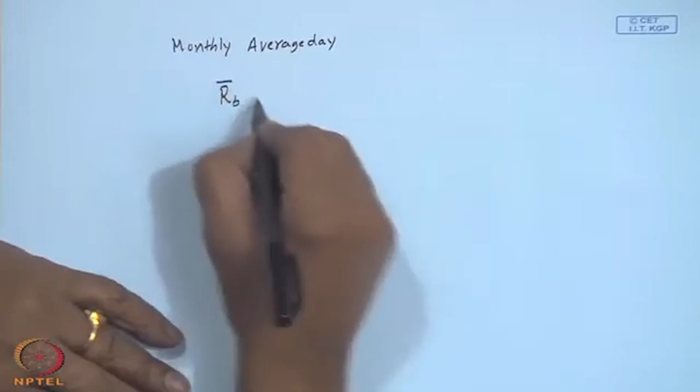As we have done for flat plate collectors or fixed slope surfaces, R b bar m for simplicity is nothing but R b bar evaluated with delta equal to delta mean, where delta mean is the recommended mean declination for each month. So the formulas are known and there are analytical expressions for mode 1, 4 and 5, and modes 2 and 3 are not analytically integrable, so one may have to go for numerical integration.

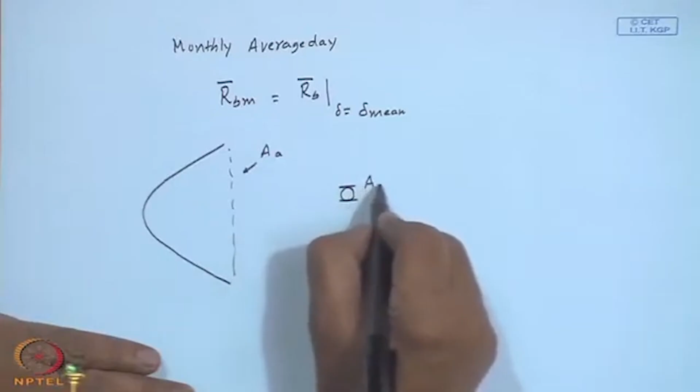Whether I b under terrestrial conditions is used or even under extraterrestrial conditions. Now the question comes: we have a parabola with an aperture area A a, focused onto a receiver of projected area A r, and the geometric concentration ratio is defined as A a upon A r.

Now, can we have C r equal to 10? Maybe yes. 100? Yes. 1000? Question mark. 10,000?

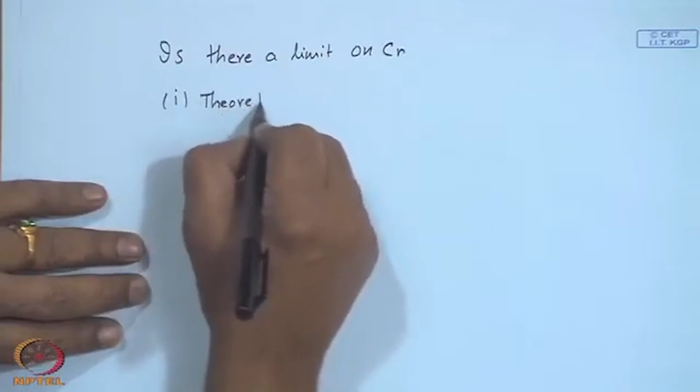Let me go to the next page. Is there a limit on C r? One, a theoretical limit. Second thing may be practical, arising due to manufacturing.

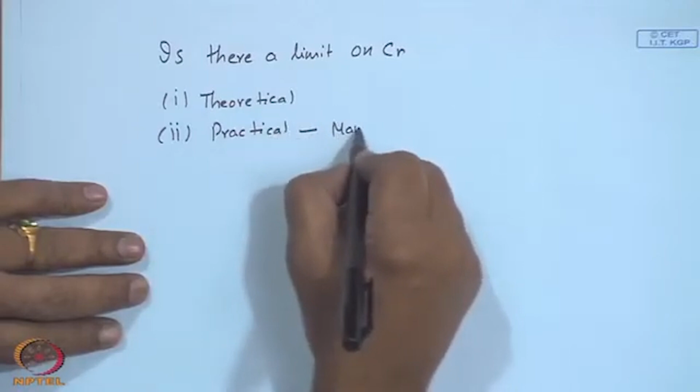For example, how perfect is the reflector, how perfect is the refractor, how perfect is the optics, and though we do not aim at 100% efficiency from the thermal point of view, will all the radiation that is passing through the aperture get reflected and go exactly onto the receiver, depending upon the tracking mode.

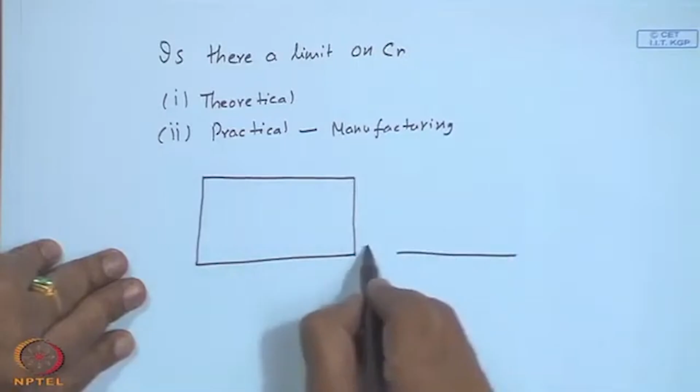So practically, if you take the plane of the receiver, my distribution will not be a perfect rectangle like this, but it may be something like this, going a bit beyond the receiver, and technically I may have to integrate from minus infinity to plus infinity, whereas this may be of minus w by 2 to plus w by 2, and intensity also may not be uniform. This is one aspect.

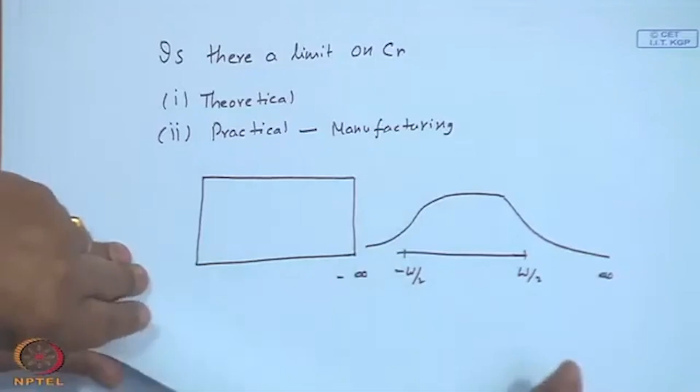And regarding the reflected rays, whenever we are showing it as a cross section, this is the small receiver, circular type, and this is the reflector coming over here.

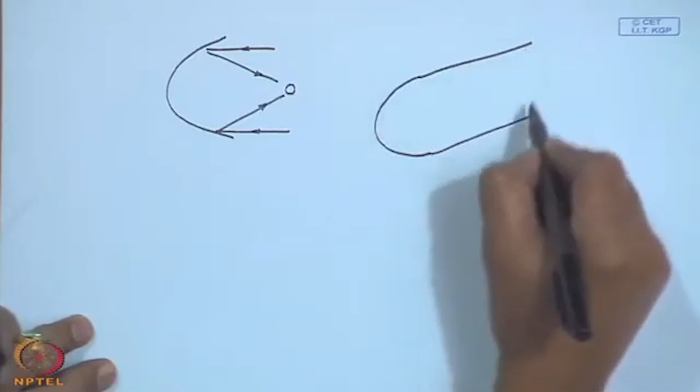Now, if I make it a somewhat two-dimensional view, this may be the reflector and the tube may be here. So, depending upon the tracking mode, my reflected rays may go to east or west or north and south, and may not exactly fall on the receiver tube.

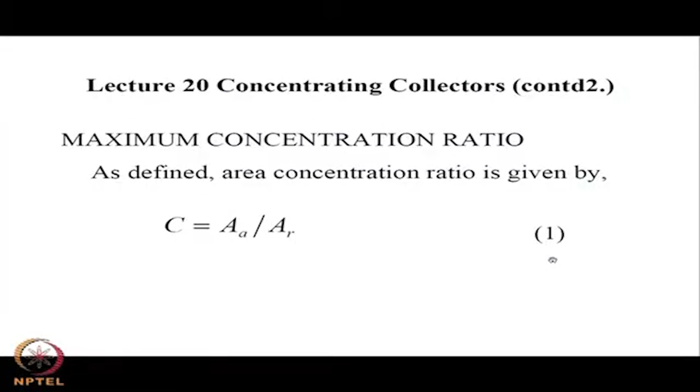So all that reflected radiation may not be captured by the receiver. Effectively, the concentration ratio could be different, but even if we talk about only the theoretical possible maximum concentration ratio, this has an upper limit depending upon...

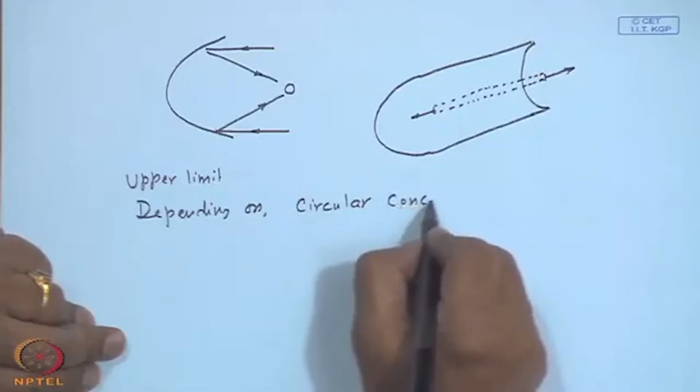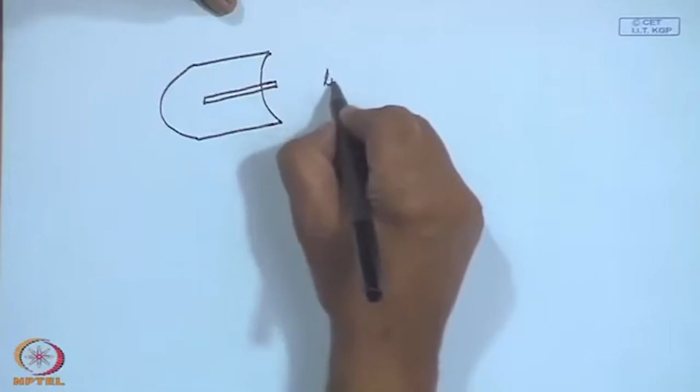...whether it is circular concentration or linear. So if you have a parabolic system like we have drawn now, the attempt is to focus onto a line. So this is a sort of linear concentrator.

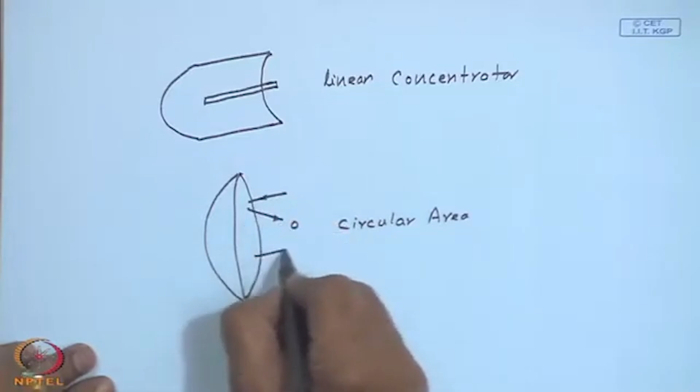The other way around is, if you have a paraboloidal dish, this will try to focus onto a circular area. So technically, this can be a point, this can be a line, or is it possible? So which we shall show, the possible maximum.

Let this big circle be the sun, of radius r, at a distance of capital R from the aperture area, and at the same distance the receiver also, making the half angle theta s.

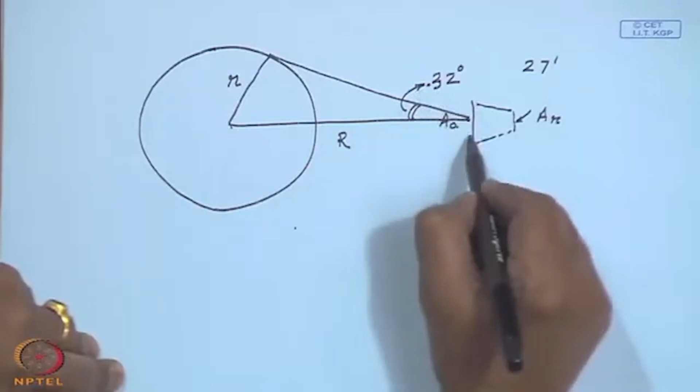Or 27 minutes. For a perfect concentrator, this is the sun of radius r at a distance from the earth of capital R, and the angle subtended is 0.32 degrees onto the aperture area of A, and A r is the receiver area.

You do not have to worry whether this should be before or after, it is only a symbolic representation showing A is not equal to A r, A r being the smaller thing. The issue is, if we consider a circular concentrator, can I make A r almost 0, making the concentration ratio infinity?

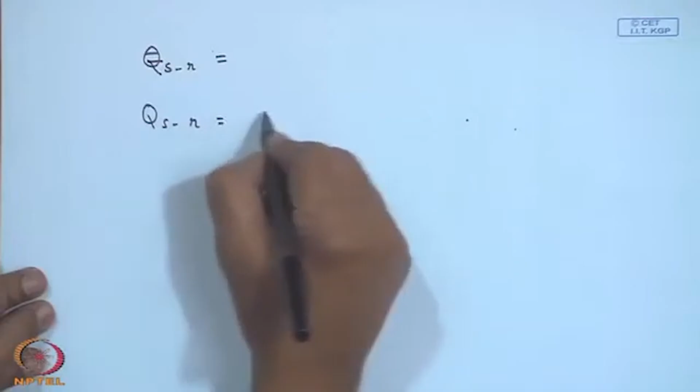So, the radiation emitted by the sun reaching the receiver will be A a into r squared upon capital R squared, times sigma T s to the power 4, where r is the radius of the sun and capital R is the distance, sigma is the Stefan-Boltzmann constant, and T s is the effective temperature of the sun.

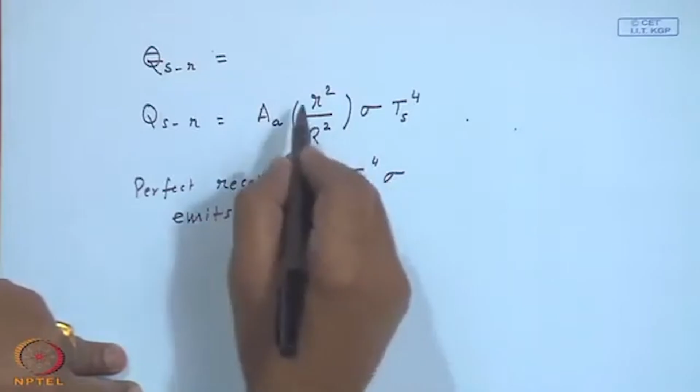A perfect receiver radiates - a perfect receiver emits area A_r into T_r to the power 4 times the Stefan Boltzmann constant sigma. You may be wondering, we are not really worried about reflectivity etc. This is the radiation intercepted by the aperture; the same thing will reach the receiver at maximum.

Now a fraction of this will go from the receiver to the sun, because the receiver is small and the sun is big: A_r T_r to the power 4 into sigma, multiplied by the fraction E_rs. So of the emitted energy at temperature T_r by the receiver, a fraction E_rs will go back to the sun.

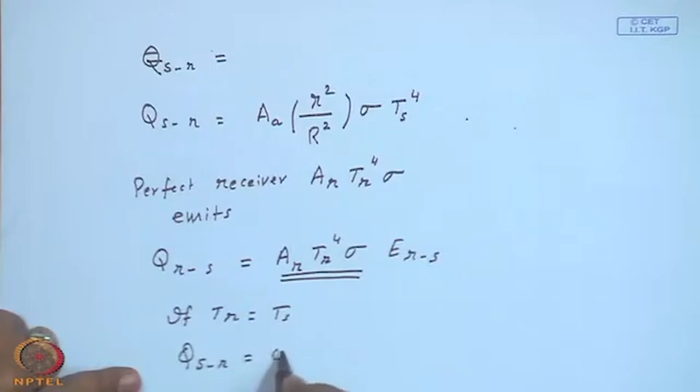Now, if T_r equal to T_s, that means in principle if the receiver reaches the sun's temperature, my Q_sr should be equal to Q_rs. Since there is no more temperature change between T_r and T_s, the emitted radiation should be equal to the radiation received from the sun.

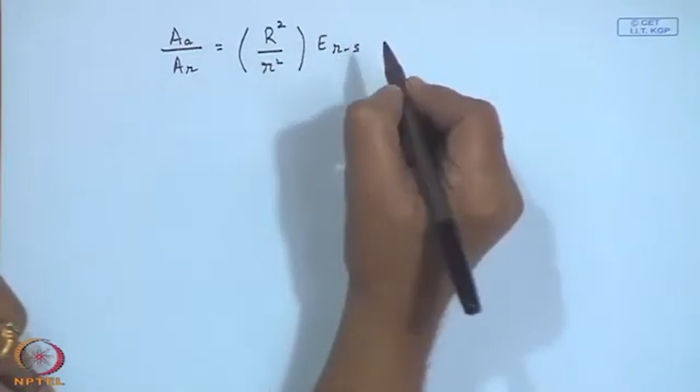So that gives us A_a by A_r equal to r square by r square times E_rs. Now for the maximum value, we are estimating the theoretical maximum, so I can assume this E_rs equal to 1. So (A_a by A_r) max equal to r square by r square equal to 1 by sin squared theta_s.

So if theta_s equal to 0.27 degrees, the maximum possible concentration will be 212. If you put in the value of theta_s, you will get 212. This is for a circular concentrator.

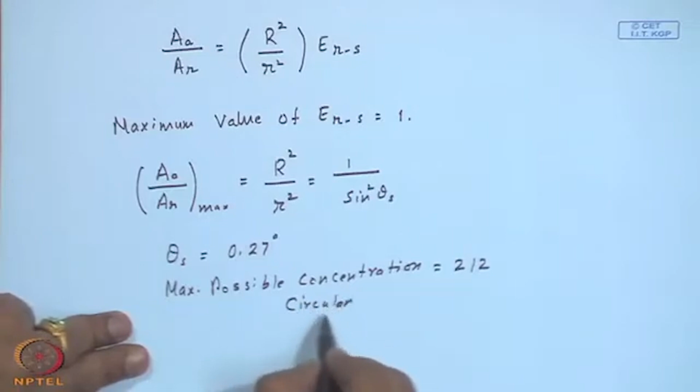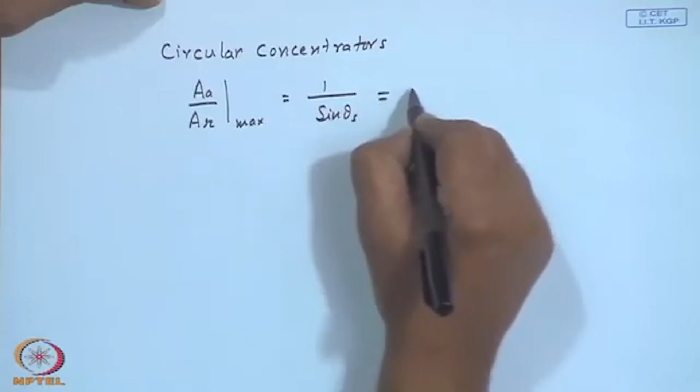So a similar procedure for circular concentrators gives the max concentration, which goes to 45,000.

Okay, I will just check these values in the next class, because I think somewhere this linear and circular concentrators numbers are confusing. I will just check up these numbers.

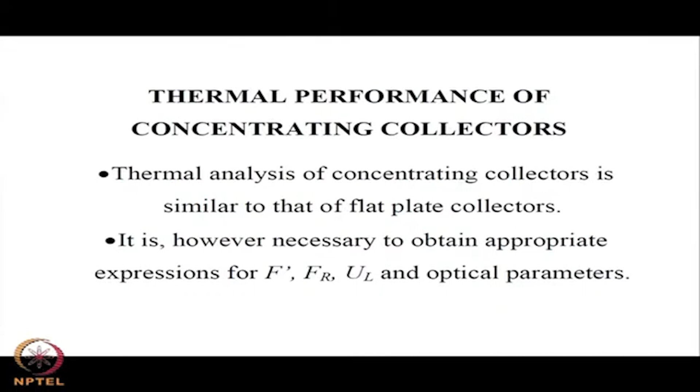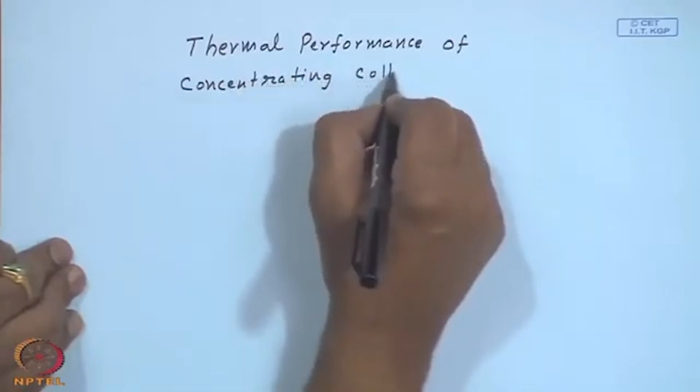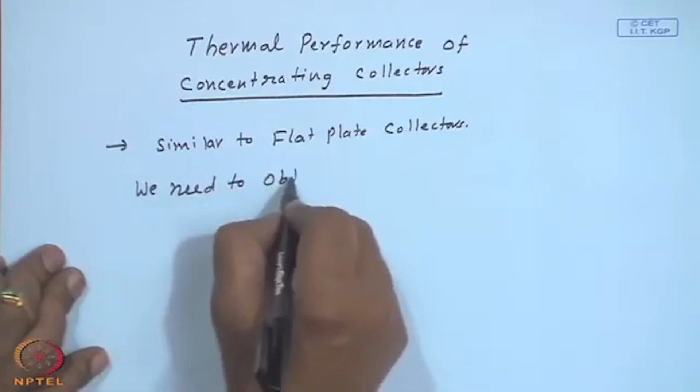Now we will go to thermal performance. This is of course similar to flat plate collectors that we have done. And we need to obtain appropriate F dash, the collector efficiency factor; F_R, the heat removal factor; and U_L, the overall loss coefficient, and optical parameters.

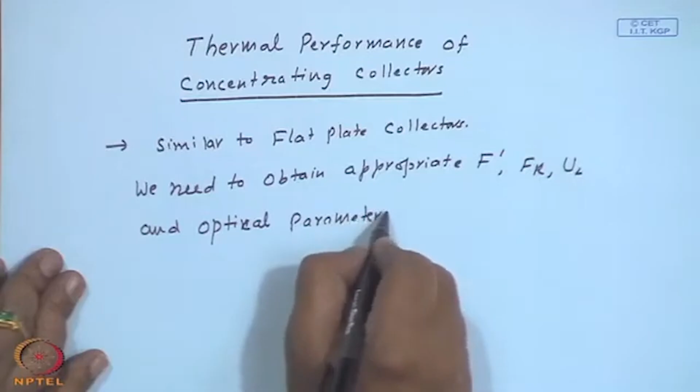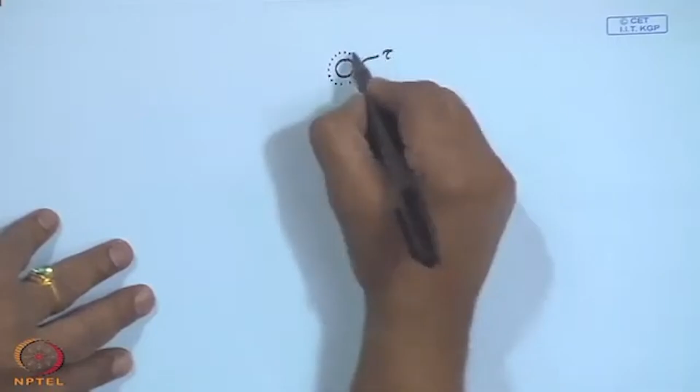Compared to a flat plate collector, if you have a concentrating reflector, there will be a reflectivity of the concentrator after the aperture. Then the receiver tube may have a glass cover to reduce emitted and convective losses. So this will have a tau, an alpha, and a rho - reflectivity of the surface. Instead of just tau into alpha, we have the reflectivity of the reflector, or refractive index in the case of a refractor, and the transmittance of the outer glass cover surrounding the tube, and the absorptivity alpha.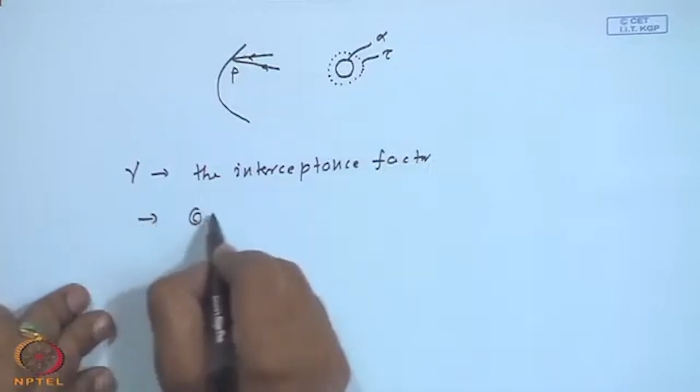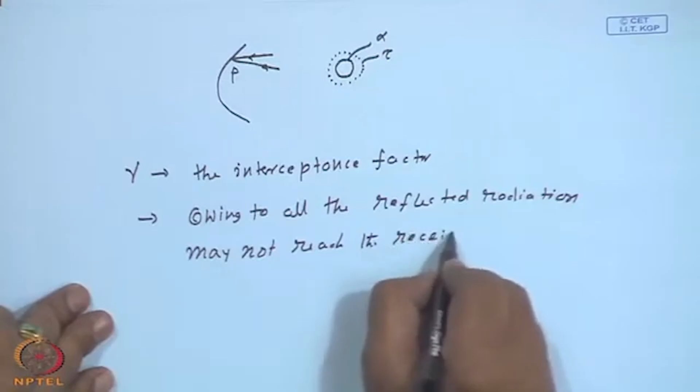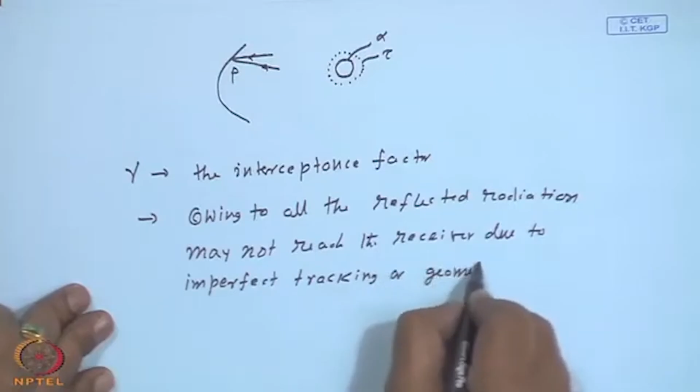There is another additional parameter, gamma, the interceptance factor. This arises owing to all the reflected radiation may not reach the receiver, due to imperfect tracking or geometric faults and non-specular reflection.

What we mean is this imperfect tracking includes tracking not being two-axis all the time. If you are having single axis tracking, like the first mode, all the time the reflected radiation may not be within the length of the receiver tube. But many times it is argued that if you have a large number of concentrators one after the other, the tube is long enough so that the reflected radiation will reach the tube somewhere or the other, maybe that of the adjacent collector. Nevertheless, a part of it may be lit and part of it may not be lit.

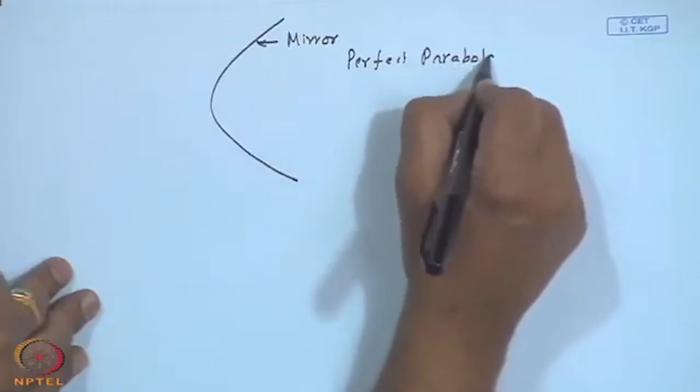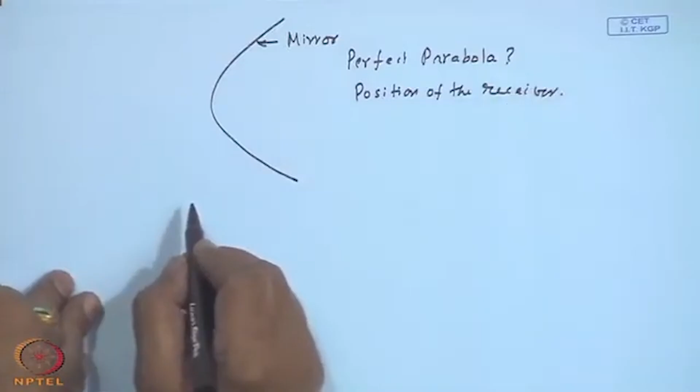And depending upon your manufacturing technique, the mirror may not be a perfect parabola. So consequently there will be some undulations because it is a large surface, so all the reflected radiation may not be striking the receiver. Then the position of the receiver itself may have imperfections, but most of it is due to the tracking not being perfect and this manufactured reflecting surface may not exactly follow the parabola that optics requires.

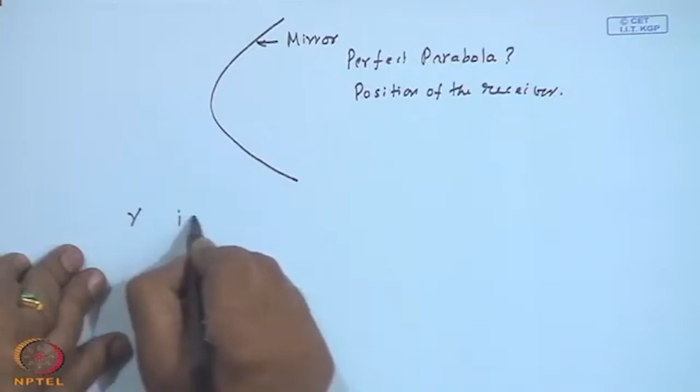So you may define that gamma, the interceptance fraction factor, is the fraction of the specularly reflected radiation intercepted by the receiver tube.

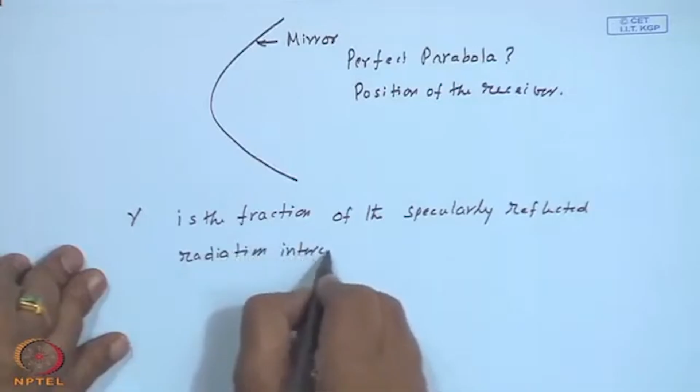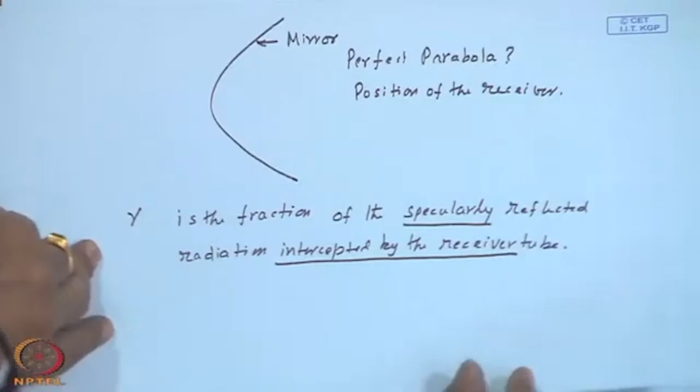So please note, it should be specular and it should be intercepted by the receiver. Non-specular will not reach the receiver, at least we cannot assure it, either because of imperfect specular reflection or imperfect position of the receiver. All the radiation reflected from the mirror may not reach the receiver.

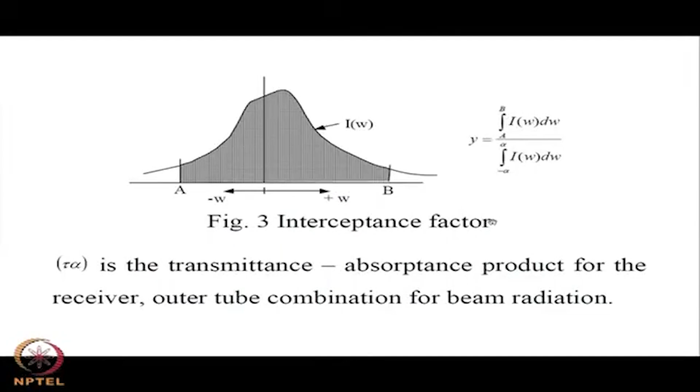So schematically you can show something like this. If this is the distribution of the intensity on the receiver plane, with a finite width of minus w to plus w, and this may be going, as I said, to infinity on both sides, no matter how small it is.

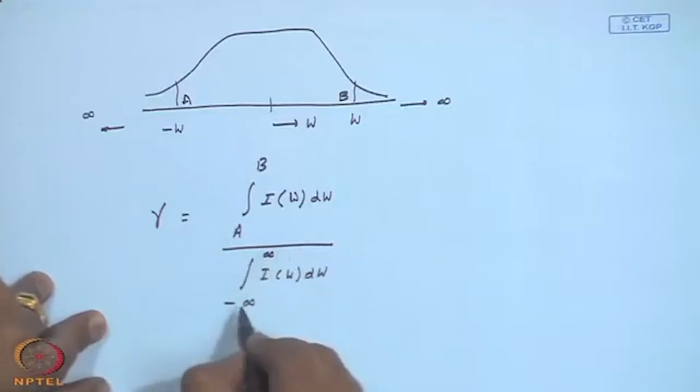My interceptance factor gamma will be: this may be point A and this may be point B, A to B, I w d w, so let me put it this way, this is the integral of I w d w from minus infinity to plus infinity. The figure looks like A, B and alpha, but they should be infinity to infinity. So this is the radiation intercepted by the receiver, and this is the radiation that technically got reflected up to including infinity, and if I find out the ratio, I will have the interceptance factor. Now some clarification is required.

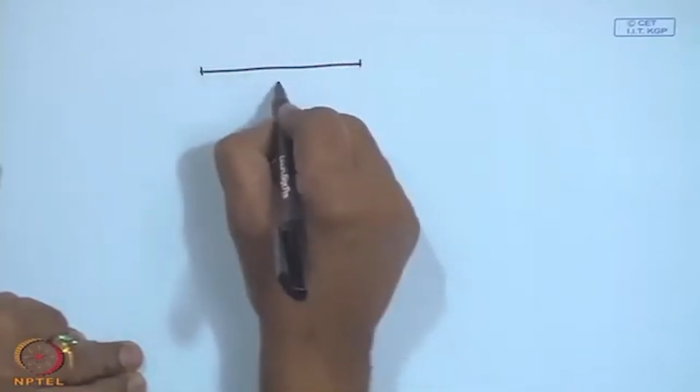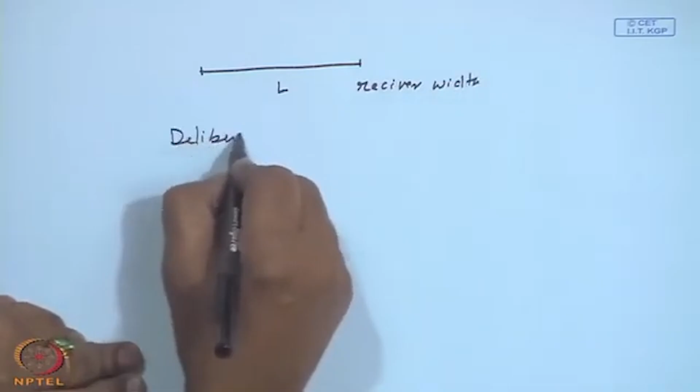Instead of that, if I have got some L as the receiver width, we may deliberately choose L less than what is needed to capture, to receive the reflected radiation.

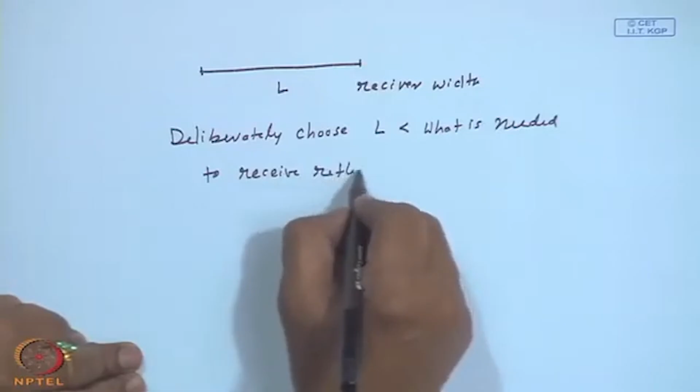Because if you see the type of distribution that we are having over here, 90% of it may be in this region. So if I add this much and this much, I will be having a larger area for the heat losses to take place, though the absorbed or reflected radiation is relatively a small portion. So we may deliberately truncate the receiver width to a certain value.

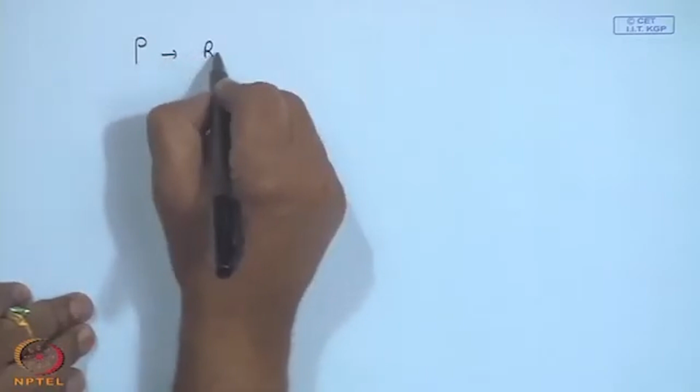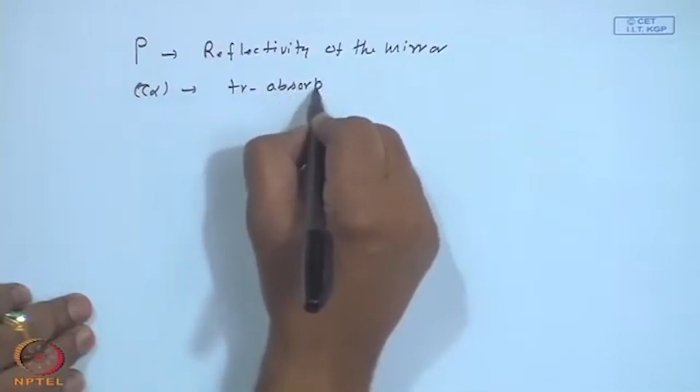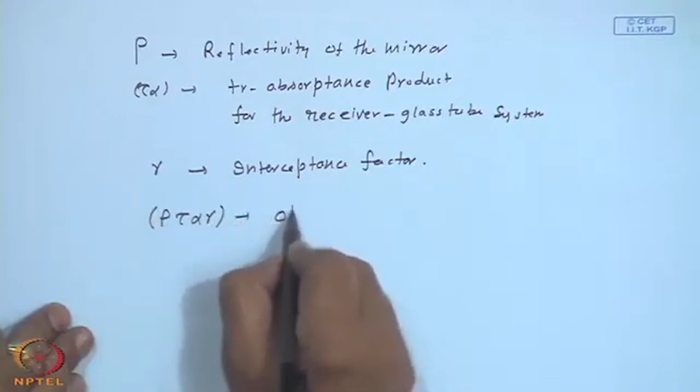If rho is the reflectivity of the mirror, and tau alpha the transmittance-absorptance product for the receiver glass-tube system, and gamma is the interceptance factor, then you have a total rho, tau, alpha, gamma effective, which is the sort of optical efficiency.

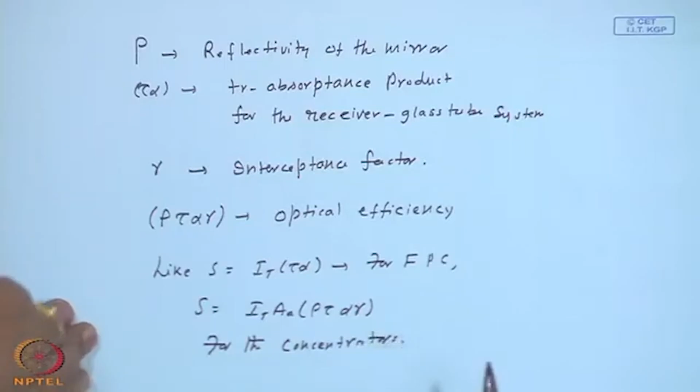Like S equal to I times tau alpha for flat plate collectors, we may have S is equal to I T times A A times rho tau alpha gamma for the concentrators. Of course, if you do not have a glass cover, then this tau will be equal to 1.

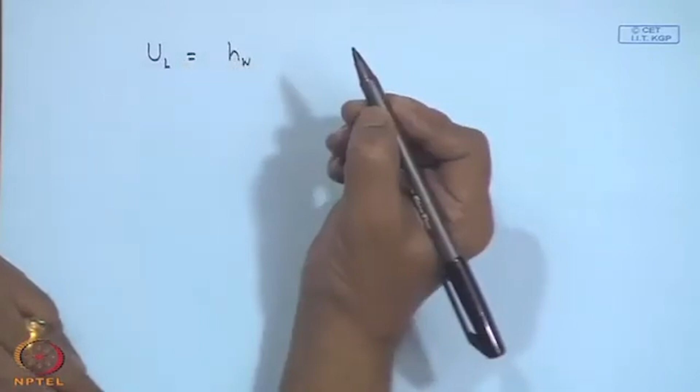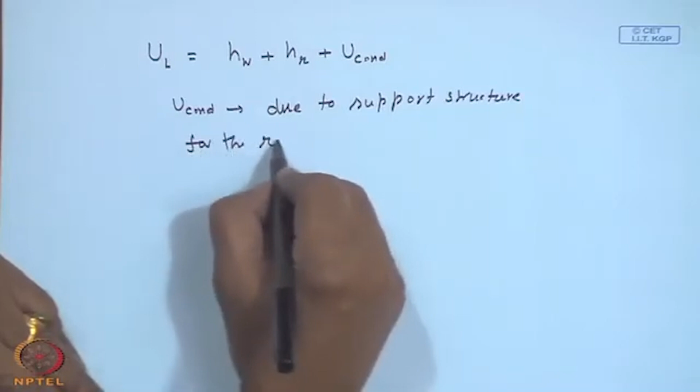Then the overall loss coefficient should comprise a wind loss coefficient from the receiver, plus a radiative loss coefficient from the receiver, plus a U conduction. This is due to the support structure for the receiver tube. Because, like we have been showing schematically, the receiver tube will not be just hanging in air, there may have to be supports with respect to the receiver, or this reflector, or a frame. With that, they may act like some sort of fins added to the receiver tube, and hence there may be loss. So my overall loss coefficient will comprise of the wind loss coefficient, a radiative loss coefficient, and the conduction loss due to the support structure.

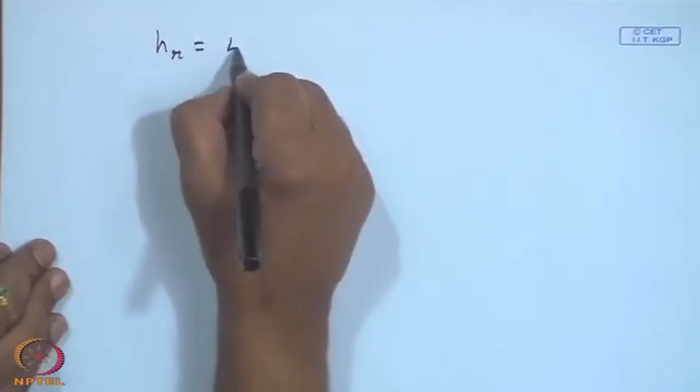And this is, of course, we can express the radiative heat transfer coefficient in terms of 4 sigma epsilon T bar to the power 3, where, as we have already defined, it is the average temperature of the receiver T r and the surrounding ambient temperature T a, in terms of the fourth powers.

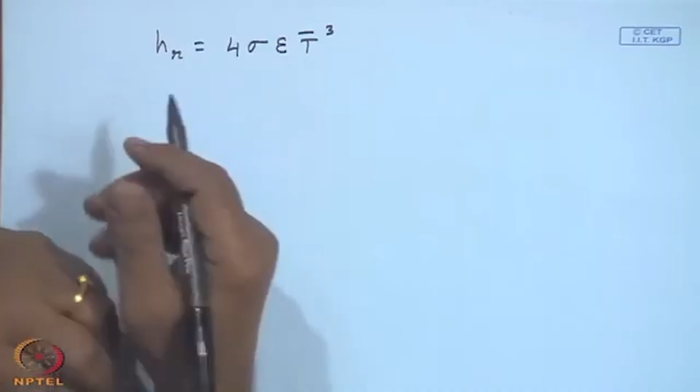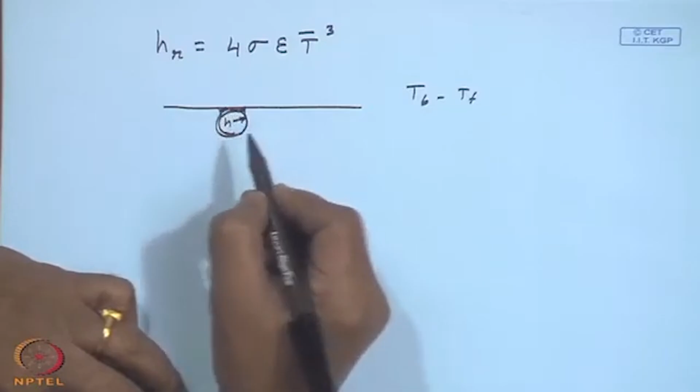The heat flux in a concentrating system is higher. The heat transfer resistance from the outer surface of the receiving tube to the fluid should include the tube wall. If you recall, in our flat plate analysis, T b minus T f has been expressed only in terms of the heat transfer resistance inside and the bond conductance, or the resistance due to the bond, but the thermal conductivity of the material or the pipe, the resistance due to the material, has not been included. But now my fluxes are larger, which calls for including the tube resistance also. So now we can write down a U naught, which you know already. I will tell you after writing down this expression.

This is the resistance between the receiver and the ambient. So this overall thing is the resistance between the fluid in the tube and the ambient. That comprises the convective resistance inside the tube and the conduction resistance in the material of the tube of thermal conductivity K. This is what we have not included in FPC.

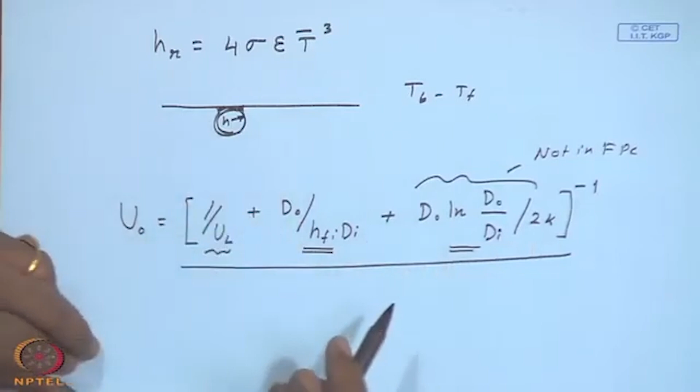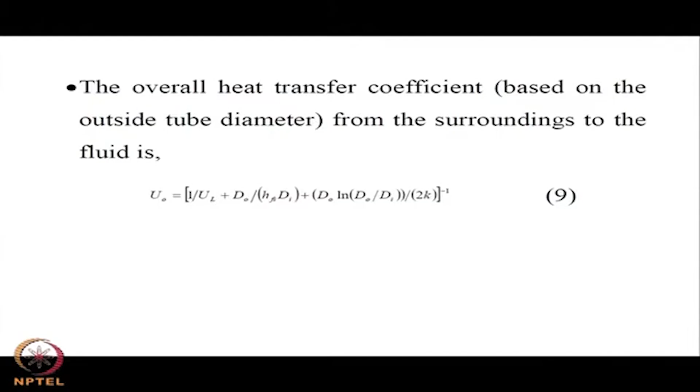So this is what we have got, the resistance and 1 upon UL. So basically it is the resistance from the fluid to the ambient, and this is the resistance from the receiver tube to the ambient. In fact, F dashed we have defined as 1 upon UL divided by 1 upon U naught.

So if we try to make a thermal analysis for the linear concentrator, for ease of representation I will show it horizontally.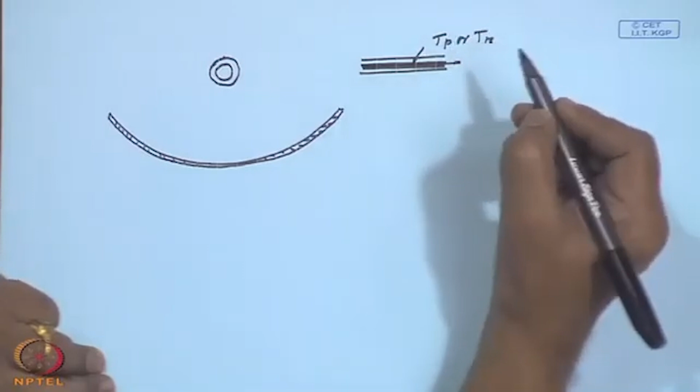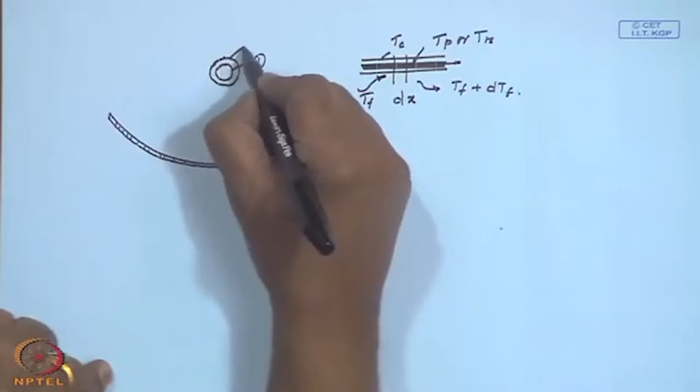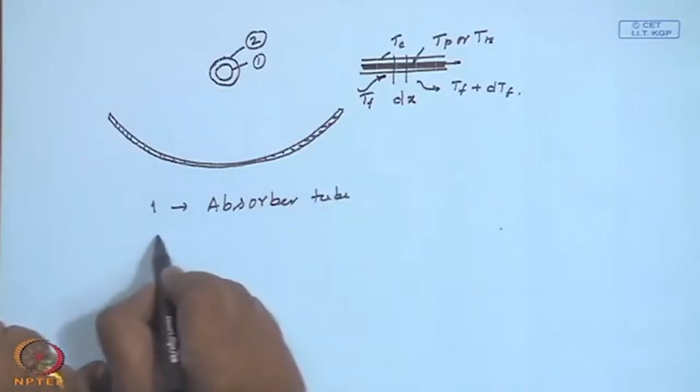This is exactly similar to what we had done for flat plate collectors. This is 1, this is 2 - there is a glass cover. One is the absorber tube, and 2 is the glass cover. Let the width of this be W. We may have a length L perpendicular to the plane of the paper.

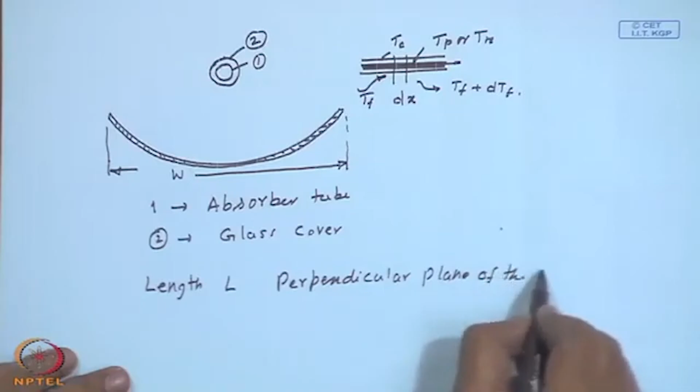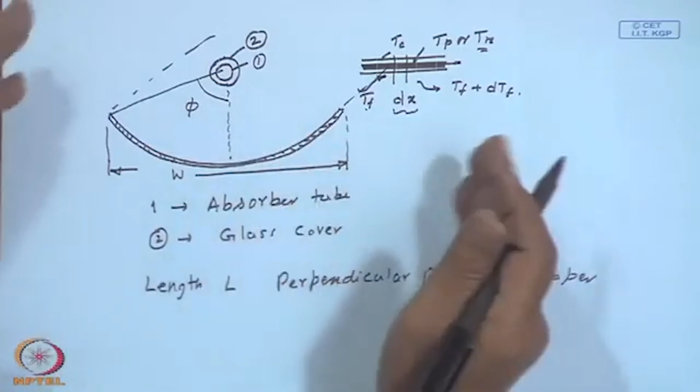So now we have a reflector of width W, length perpendicular to the plane of the paper L, through which a fluid is flowing across an elemental length of dx. The temperature of the fluid increases from Tf to Tf plus dTf, and the receiver tube is at Tr or Tp in your flat plate terminology, and the outer cover is at a temperature Tc. With respect to the axis, this is some sort of an angle phi, which indicates how big the parabola is. The parabola technically can go on up to any extent.

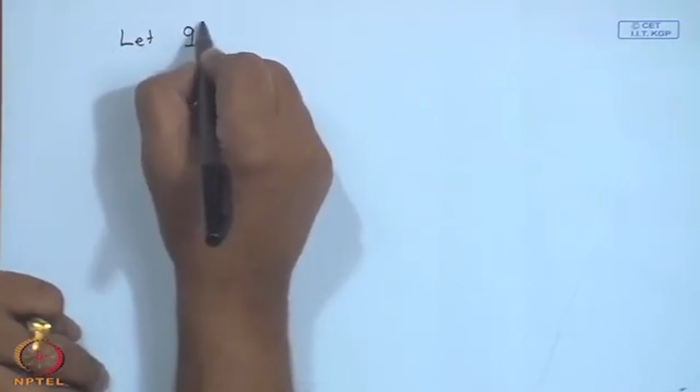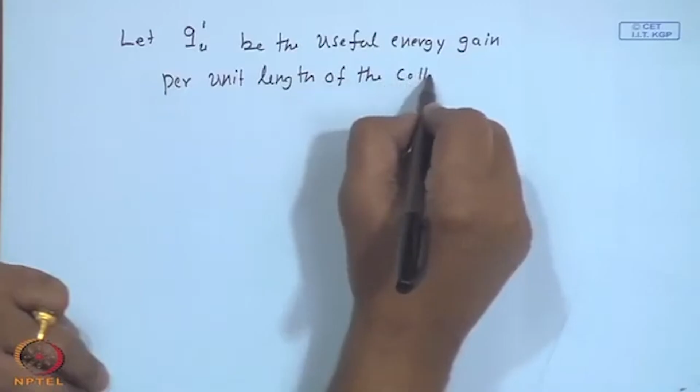So now let Qu dashed be the useful energy gain per unit length of the collector, that perpendicular to the plane of the paper L, 1 unit length we are considering.

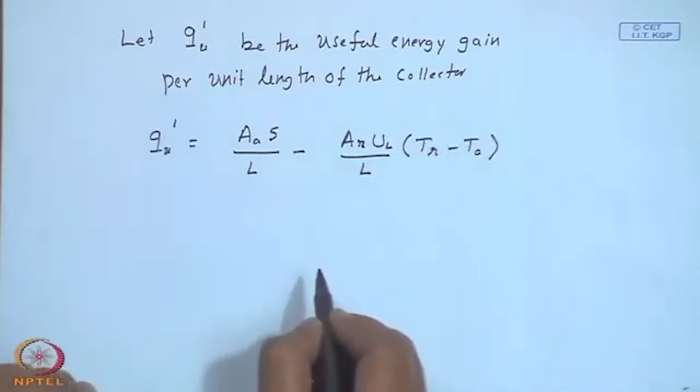This Qu dashed will be A times S by L minus AR UL by L into TR minus TA. So this A will be AW will be there, into L will be there, or accordingly appropriately that is included in this. This is in fact, if L is not there, it would have been the total energy gain based upon the area, absorbed energy, and the loss based upon the receiver area.

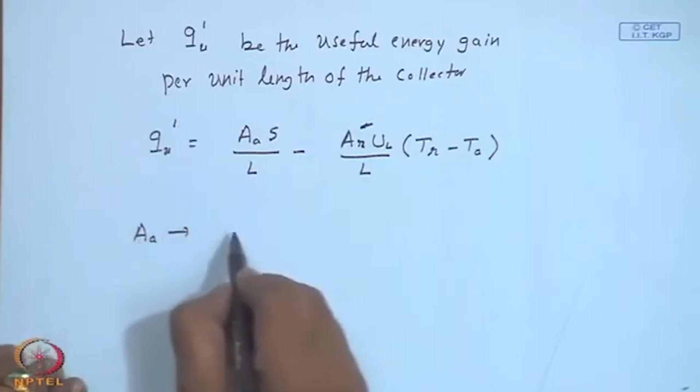So A can be considered as unshaded aperture area. For more accuracy, what we do is we consider that the receiver tube may cast a shadow on the aperture plane or obstruct the solar radiation entering through the aperture. There is no shadow because the aperture plane is only an imaginary line, there is no physical plane present over there.

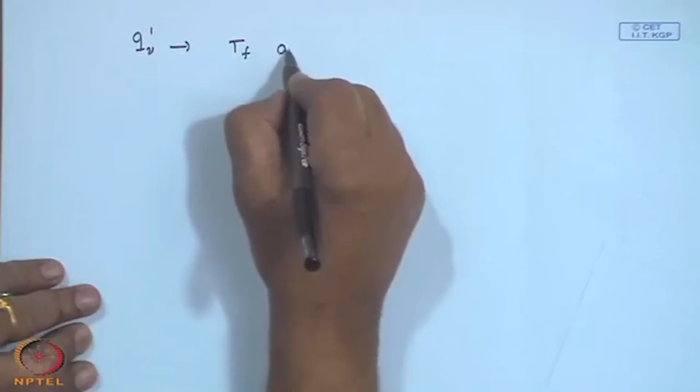AR is the receiver area. It is just like the energy balance we have done, and Qu dashed can be written in terms of the local fluid temperature Tf and Tr.

So Qu dashed will be Ar by L into Tr minus Tf, divided by D naught by Hfi times di, plus D naught by 2k log D naught by di. You will find that this is the temperature difference available between the receiver and the fluid of area Ar per unit length, and this is the resistance for the convection inside the tube, and this is the resistance due to the wall of the tube.

So Qu dashed, as we commonly express it, is F dashed times area of the aperture per unit length times absorbed energy, minus A by Ar times UL times Tf minus TA. This should be Ar by AA, otherwise it will lose more heat.

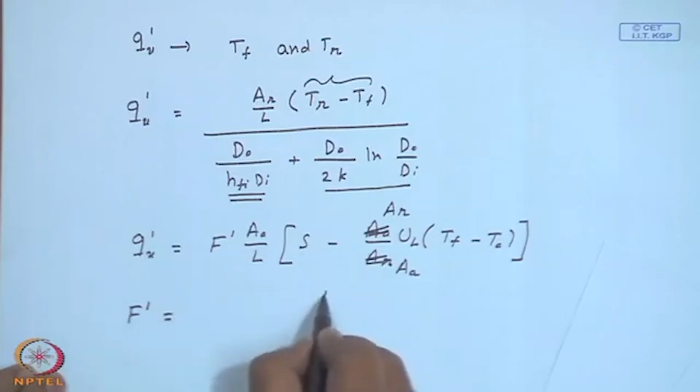So now if you compare these equations, F dashed will be given by 1 upon UL divided by 1 upon UL plus D naught.